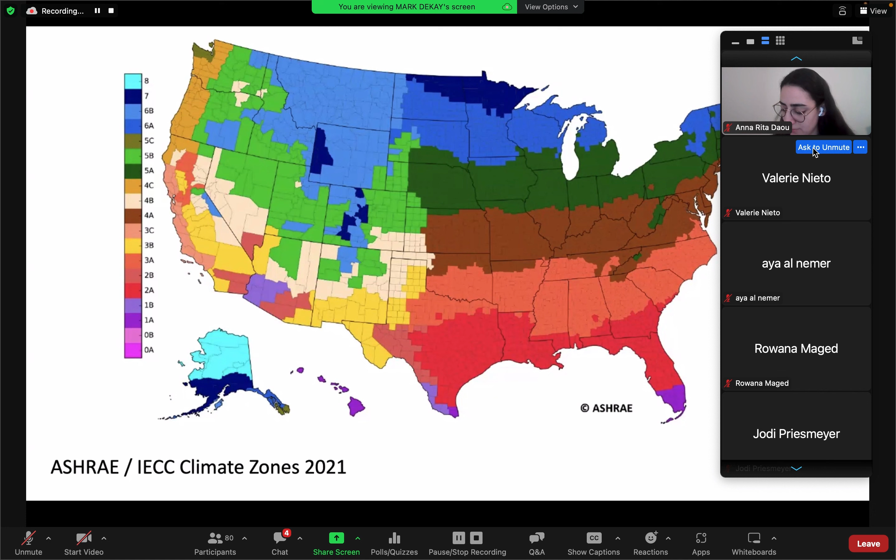I think this logic of the evolution of climatic zone thinking for buildings is important, because ASHRAE and the Department of Energy really started off with a very North American, or even continental US-centric idea, and they didn't cover the hot and cold places very well. Another thing happening is that because of climate change, many US counties have been reclassified to warmer zones.

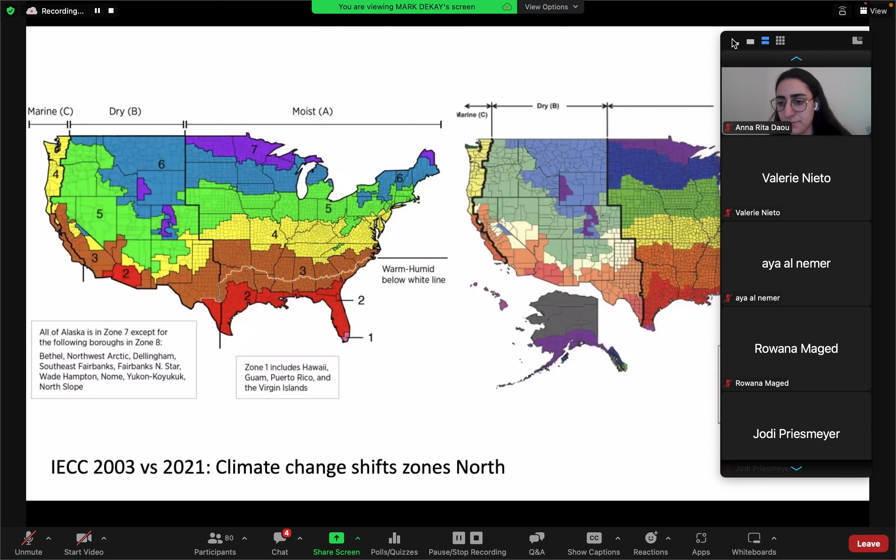Almost all the zones that changed between when we started this system—2003 on the left, and 2021 on the right—almost all of the places that changed got hotter. You notice down at the tip of Texas, there's now zone 1 that used to only be Hawaii and South Florida. In South Florida, that zone has crept further north and gotten bigger.

If you look at the line between zone 3 and zone 4 in Tennessee, over on the west side near Memphis, in 2003 that was the only zone 3 part. Now that line has moved up so that almost half the state is zone 3, not zone 4. That's happened all the way up—they just keep pushing further, and that's in less than 20 years. So if you want to see what's happening, there it is.

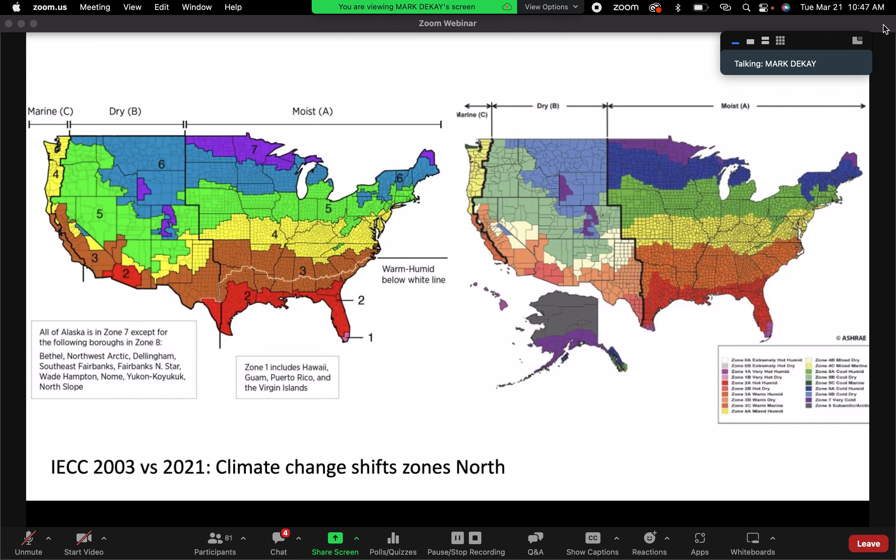Climate change is real. Notice that these IECC types classify climates as A, B, and C—A moist on the east side, B dry on the west, and C marine out on the west coast. Remember A and B particularly, because we're going to look at why that doesn't work so well.

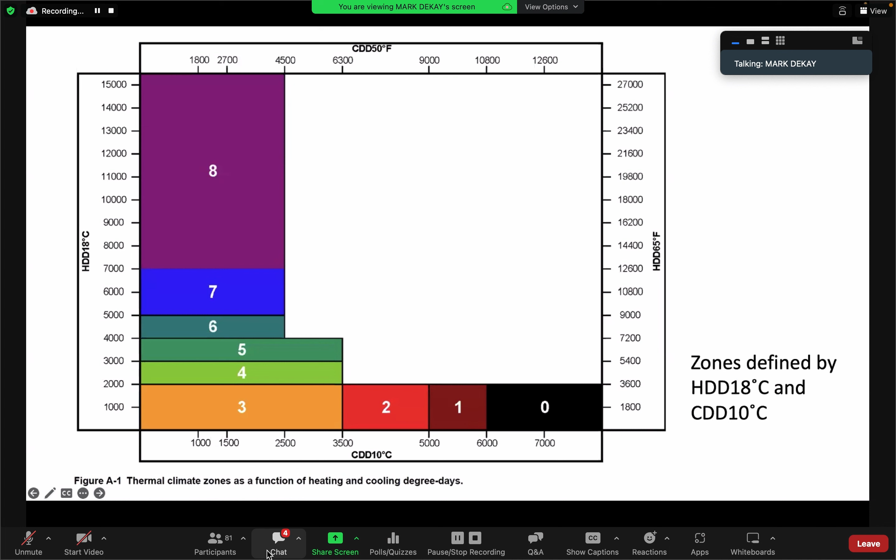Here's a graphic from ASHRAE useful to decode these zone definitions. This new zone 8 goes from 7,000 heating degree days up to the coldest place on the planet. The new zone 0 goes from 6,000 cooling degree days up to the hottest place on the planet, whatever that would be. So they just made some new zones, but they became very large.

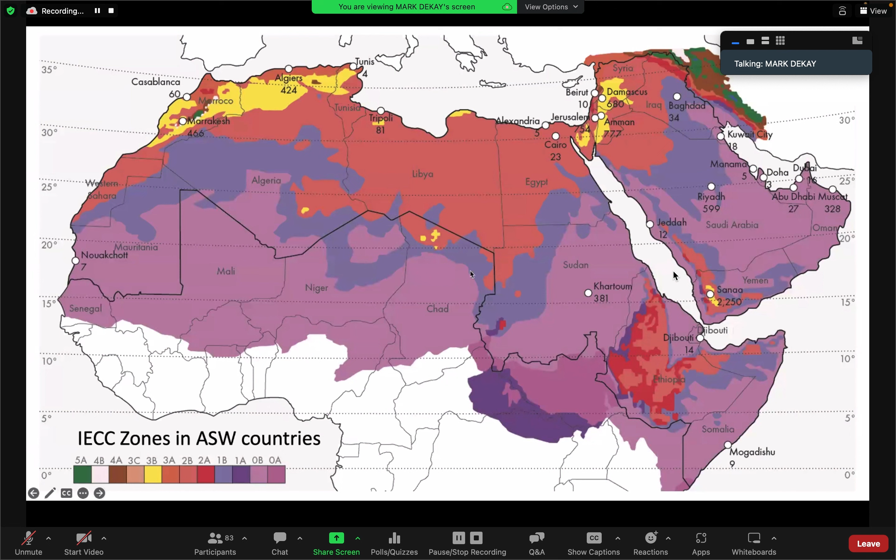Immediately, however, it seemed that something was off. Abram, I have to give him credit, he knows the region, and he noted that Jeddah and Riyadh were both classified as zone 0B, very hot and very dry. But Jeddah is by the sea, very humid, whereas Riyadh is inland and very arid. How could these two extremes of humidity, like Miami and Phoenix, be in the same zone? This clearly wasn't looking good for our idea of recommending strategies by climate zone.

So we had a problem. We put it out on the email list, we called up people we knew, we said what should we do? And some experts said we should use Koppen Geiger.

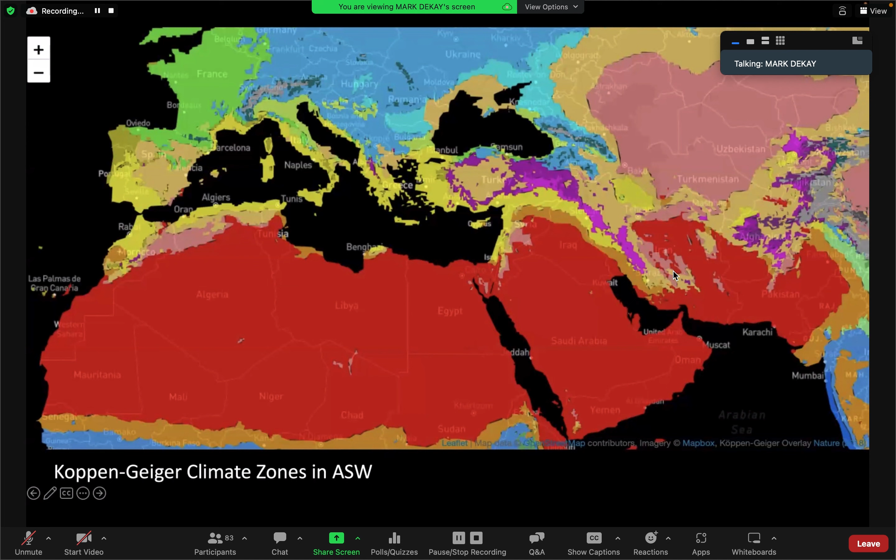When we zoom in, we can see Saudi Arabia here. It looks like this: it's all one zone, it's all hot, it's all desert. It's all zone BWH in the Koppen system, hot desert. So again, Koppen has Jeddah and Riyadh in the same zone.

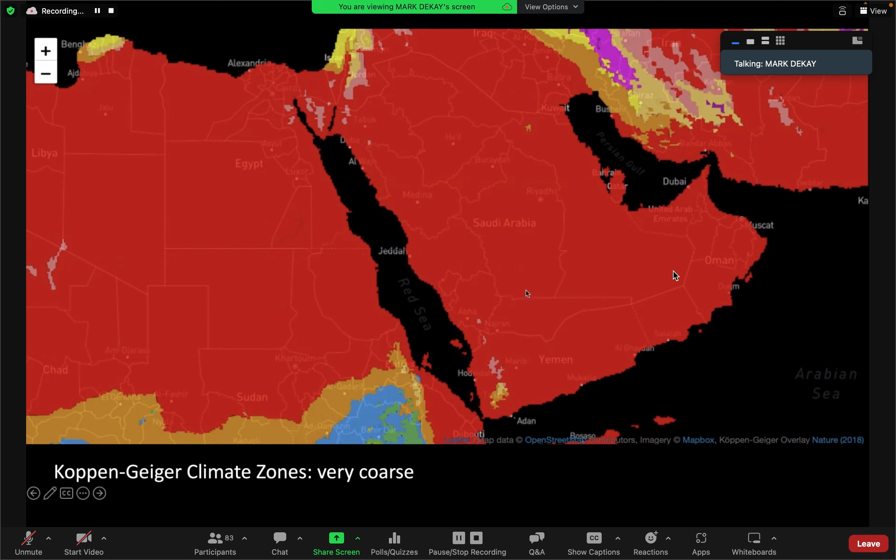And you might say, well, so what? Except that if you're using a system of climate zones to recommend design strategies, you can't have those two cities in the same place. So Climate Scout is recommending the same design strategies for very humid Jeddah and very arid Riyadh. Here you see evaporative cooling, green roofs, water features like a fountain. That's great if you have dryness, but not great if you have humidity. It doesn't work at all. In fact, it makes things worse.

So clearly Koppen, and therefore Climate Scout, was not making these important distinctions about humidity, which are driving things like evaporative cooling, dehumidification, latent loads in cooling systems, and so forth. So again zeroing in, looking at our real method here, we took a look at relative humidity.

We looked at it in several ways, annually and for the hottest 6 months, and we've got 20-some odd cities we're looking at. This is just a sample. And it turned out it didn't work at all, it failed. For instance, zone 0 ranges from 14 to 58% humidity. You get 58% in a zone 0, hotter than Miami, hotter than South Texas. That's a lot of moisture in the air when the air is that hot.

Zone 2B, supposedly dry, had more humidity than 2A, moist Beirut. And 3A Casablanca, 3A Algiers have the same values, so a dry and a moist zone had the same relative humidity. So this wasn't going to work. We didn't really think it would work, but people said try it out, so we did.

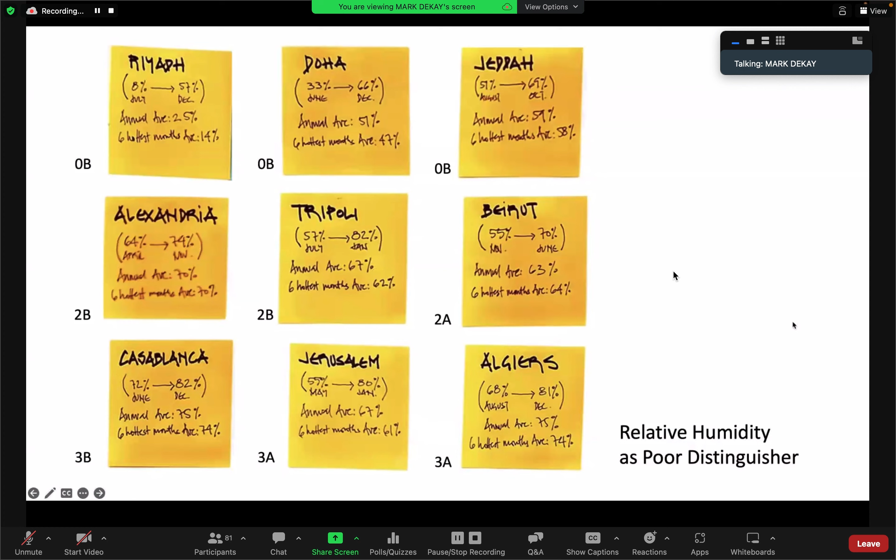Then we said, all right, we remembered there's this white line. ASHRAE used to publish these maps with a white line that was the warm, humid line, and it was actually on the original climate zone map from 2003. So we asked again, guys, do you know where this comes from? We asked all our buddies in the building science world—maybe they're not old enough to be in our category—and many of them, so nobody knew where this came from.

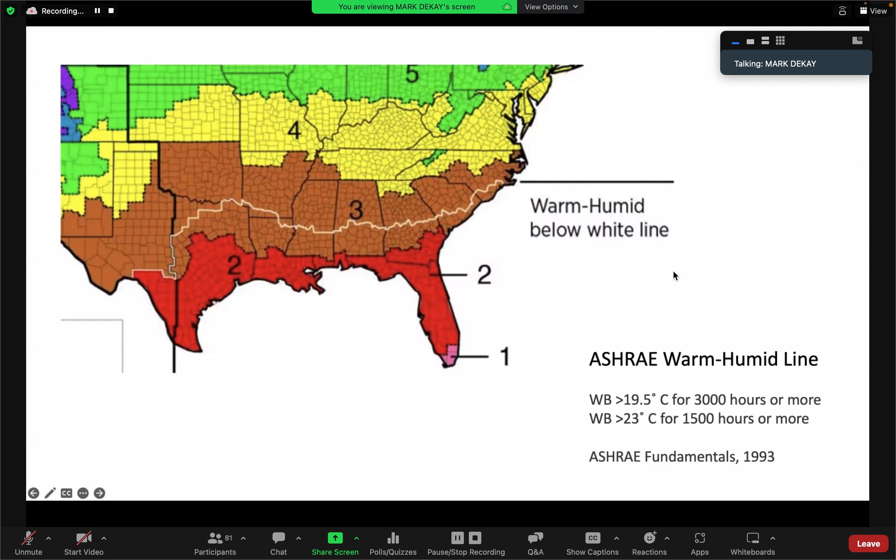So we went back into the literature, and finally, back to 1993, we found it in the ASHRAE Handbook of Fundamentals, which defines the warm humid zone using wet bulb temperature. It's like dry bulb, except, well, you know what wet bulb is—it's a much better marker for humidity. So they said if it's 19.5 C for 3,000 hours or more during the hottest 6 months, we'll call that warm and humid, or if it's 23 C for 1,500 hours, we'll call that warm humid.

So we said, all right, let's try that for all of our climate zones. We got into the hourly data and ran the numbers on it.

We counted up these wet bulb hours in each location above these two thresholds in the hottest 6 months, so we could compare it to that ASHRAE line. And we got some strange and unexpected results. In the red box here, all but two of the 0B hot and dry desert cities were actually classified as humid. And by this definition, probably what shouldn't have turned out this way in our mind, none of the A, the moist climate cities, qualified as warm humid. So Beirut, for instance, was almost warm humid, but not really meeting the metric. This metric began to explain the difference between the arid and the humid in the hot zones, even where there was not much rainfall.

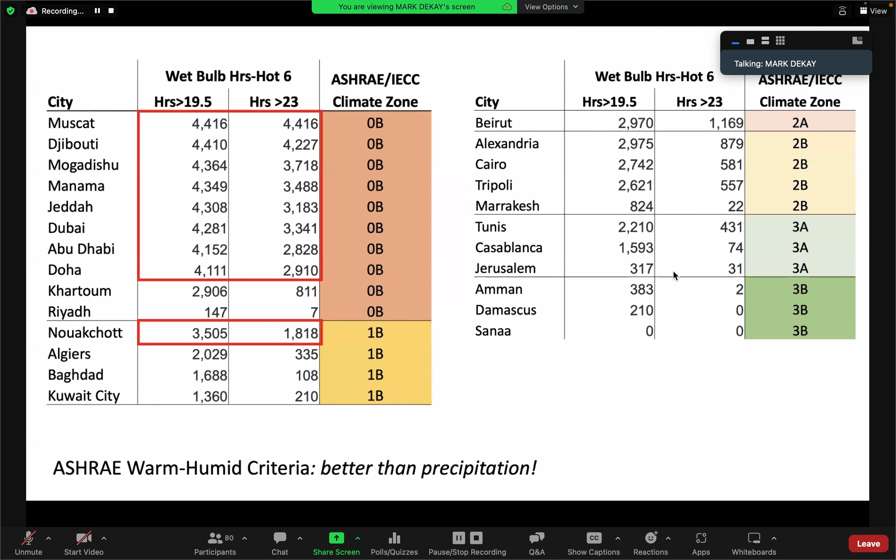But we also started to think, well, what about Muscat, Oman, right? This place that's super humid. Is an hour there equal to one in Casablanca? What if the wet bulb was actually way above this 19.5 threshold? So hold that question, because we came back to it.

Meanwhile, there's a lot of streams going on. We're posting on really big walls, pin-up walls, two complete walls in one room. We're posting examples of traditional and modern architecture from each of these cities or near them. And we're looking for what strategies are in those buildings, and could that tell us something? And then we're trying to sort these cities into climate types by looking at various metrics. And it's working, little by little, better and better.

And on the other hand, some people said, well, just forget about climate zones. You don't need climate zones anymore. We have computers. Just count up the hours in the different strategies that fall into these different zones on the psychrometric chart. So if you're familiar with Climate Consultant, it uses these overlay strategies based primarily on the work by Murray Milne and by Givoni, originating with Givoni's work.

In this case, we first looked at natural ventilation, and it was useless because many of the places are just too hot to open the window most of the time, particularly if you're looking at the hot months. We started off thinking like North Americans maybe, let's take the hot 3 months, and then the hot 6 months. But the comfort zone in this case is fixed.

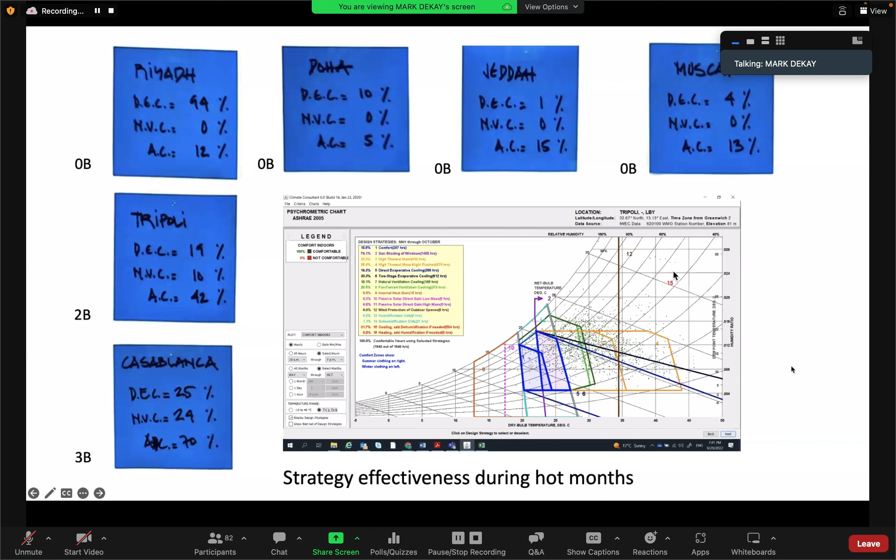So meanwhile, we decided, all right, let's improve on this wet bulb method and use wet bulb degree days, which we'd never seen anybody calculate, but it seemed like a good idea. Wet bulb degree days are sort of just like heating and cooling degree days based on dry bulb temperature, except we're using wet bulb as a base. So what that does is it says, let's look at the wet bulb temperature, the average for that particular day, and if it's higher than whatever your base temperature is, then subtract the difference.

And that's how many degree days, wet bulb degree days, you get for that day. Do that calculation day after day after day, and then add them up and you get a picture of the climate. That's how we get heating climates and cooling climates. In this case, we're looking at humidity. And this provided a much better range that aligned better with this evaporative cooling potential we were looking at. It allowed us to distinguish between cities that were closer to the sea and ones that were more inland in the same climate zone.

We tested 4 different base temperatures because we had no idea which one would work best. It turned out that if you wanted to get some numbers in every climate, we had to go with 19.5, which aligned right with the ASHRAE white line we were looking at before. So this seemed like a pretty good idea.

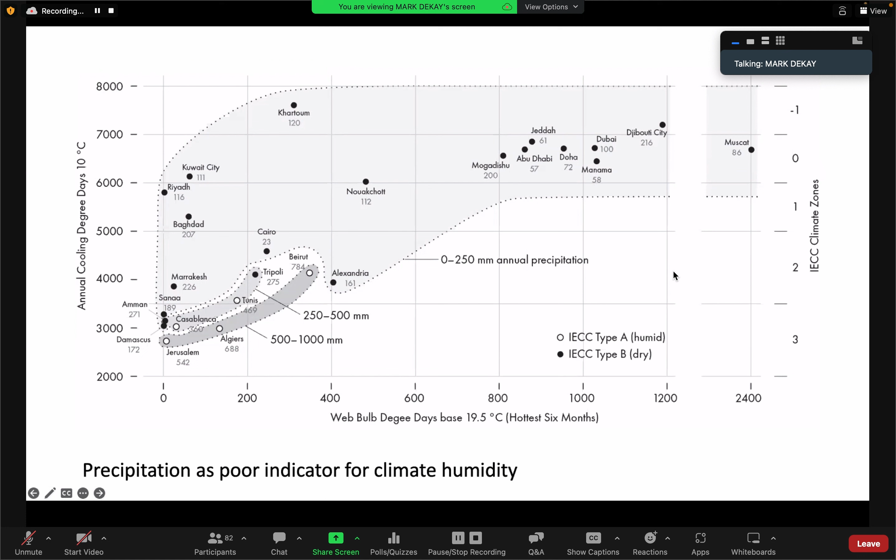So then we did the same thing with the Köppen system. We overlaid the Köppen designations, and that's these 3 bubbles now. You can also see that it doesn't work at all. It fails for making any of those important distinctions.

It has Casablanca and Beirut in the same zone. It has Kuwait City and Dubai in the same zone. And those are just radically different places.

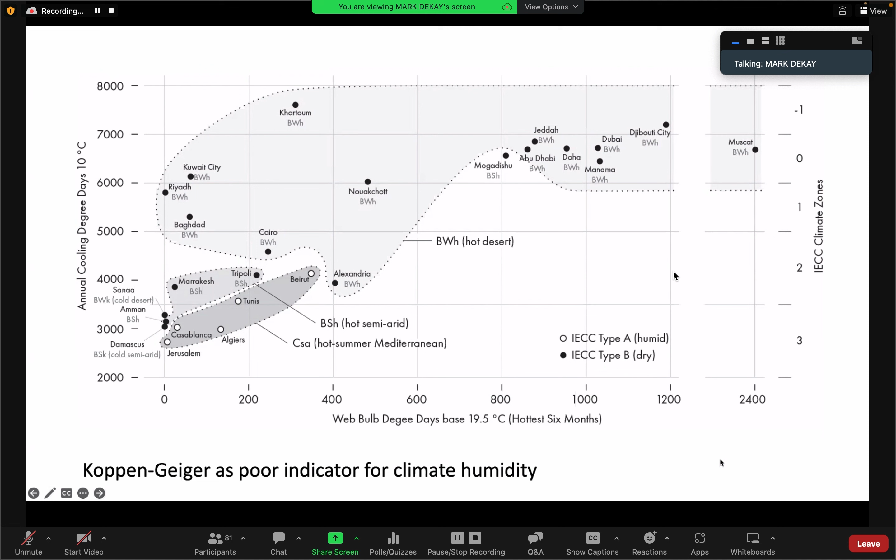So we're proposing to keep this idea of the numeric zone system, although the zone 0 that's recently been added seems kind of large, almost like we need a zone -1. On the other hand, the A, B, and C types in the typical conventional system don't seem to work very well.

We think there should be some kind of more nuanced way of understanding places based on their humidity, not based on their rainfall. These divisions make more sense in a nonlinear way, so you'll see that A, B, C, and D are not even increments of distinction. There's no right answer for that.

We made it up. But that allows us to get some distinction between truly arid places like Riyadh and Baghdad, semi-arid cities like Cairo, known humid places like Beirut, and then a whole other category of hot and very humid in the Gulf. And then there's this weird outlier of Muscat, Oman, that's just twice as humid as any other place we studied.

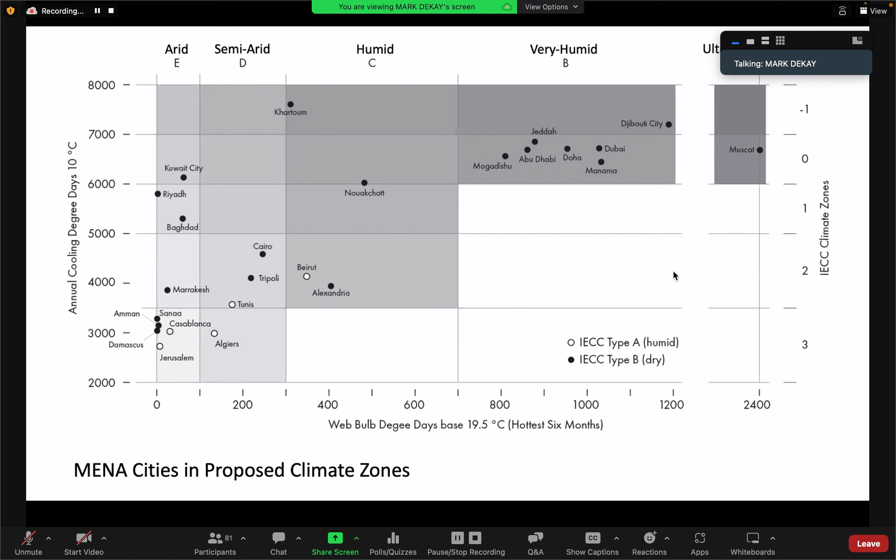So here's the simplified version. Truly tropical cities like Singapore might change this, but we haven't studied those places. Most of the region we're looking at isn't in the tropics. Some of it is, but not much.

So these wet bulb degree days seem to be a good indicator of dehumidification needs and evaporative cooling potential. We've also based it on ASHRAE's hottest 6 months. Now that may be a problem because some of these places actually need cooling all year round.

If we get out of our headspace of thinking about North America, there are places in this region where you can open the window in January and it's just fine.

The other thing is that it may be we should look at something like where this base temperature occurs for heating and cooling degree days. They're using base 10, 50 degrees. That seems to me to be suited to a big air-conditioned building, a conventional climate zone, one with a lot of internal gains. That may make sense in some places.

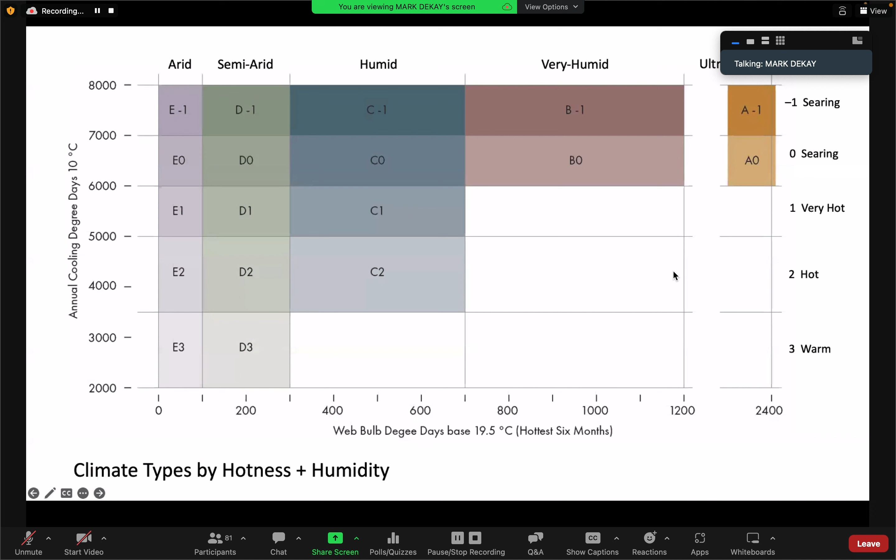It may not make sense here, because almost no one is going to start cooling when it's 50 degrees Fahrenheit or 10 degrees C outside in a residence.

So why that's important for us is that in the typical way of looking at strategies on a bioclimatic chart or on a psychrometric chart, either one, you get a fixed comfort zone.

We ran across Andrew Marsh's online psychrometric chart, which, if you choose the right choices, allows you to look at how that comfort zone moves over time as the climate gets warmer during the year.

We also recognized that the statistical percentages we were getting out of Climate Consultant didn't tell us what was happening month to month, and whether that strategy was going to work.

So what we did is assess a series of different passive cooling strategies for each city in each month. We plotted the average day for that month and the design day for that month, which is like the 2% hottest day. So we got the hottest day and the average day.

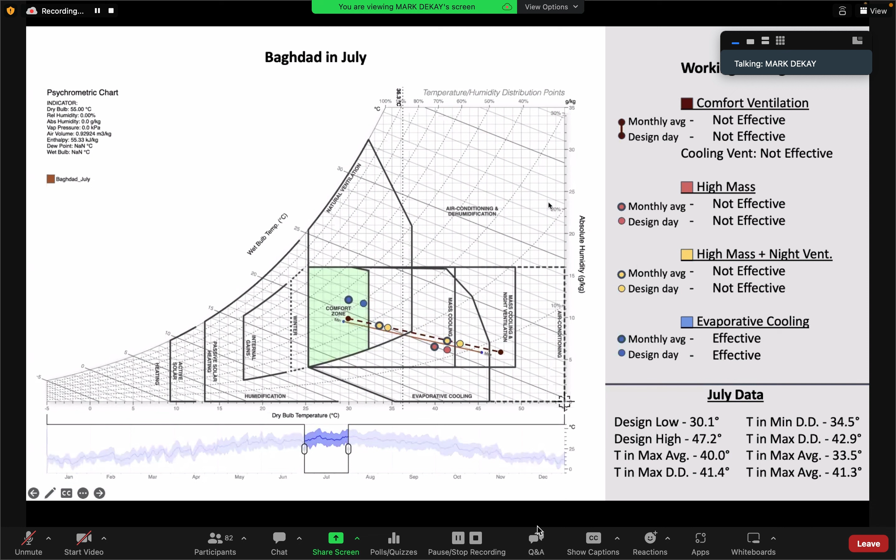And then as the climate gets cooler again, you go back towards winter. Now the zone is moving back to the left, and actually what's happening there is the passive solar stuff is even working better. The heating strategies are working better because you're dropping that climate zone back down.

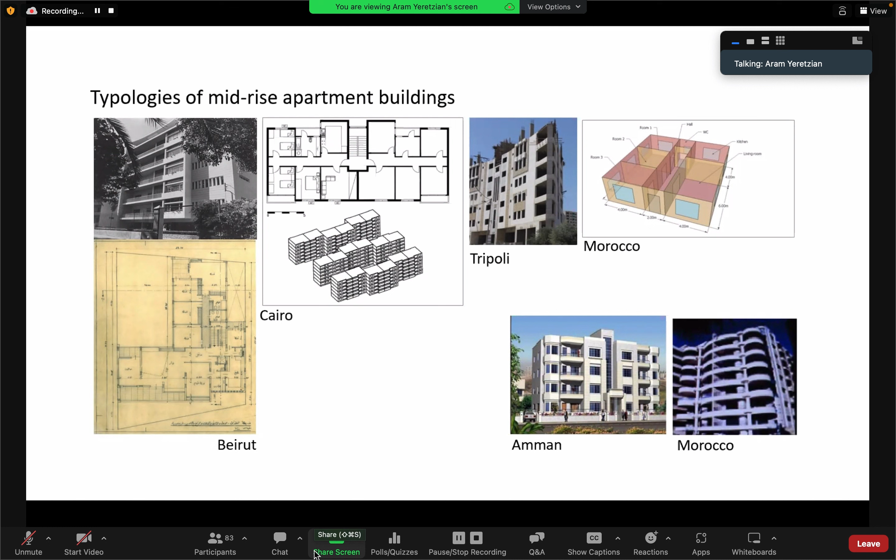This is a selection of buildings that illustrate the commonalities found in these contexts. Today we find, as mentioned earlier, very different climate zones in the Arab-speaking world. However, the typologies of the buildings are very similar - you will see similar use of materials, similar heights, similar window-to-wall ratios, etc. The characteristics of these contemporary buildings I've summarized in these 5 bullets.

If we take a deeper look, this will allow the identification of the following characteristics for a mid-rise residential building typology. This will, as you will see in a bit, inform the opportunities that may result from this methodology and approach.

There's always a vertical circulation component and a service core in these buildings. We're talking about mid-rise, and it's important to mention these are buildings from 6 to 15 floors. So there's always vertical circulation - stairs, lifts, at least one - as well as other vertical components all included in this core. It's found in pretty much all buildings.

If this component is designed to serve for natural ventilation, it can accommodate different strategies - this is where it becomes really interesting. Depending on the site's wind condition, vertical wind flow can go upwards or downwards, basically in the form of stack ventilation or as a wind catcher, which can help the natural ventilation mode in such buildings.

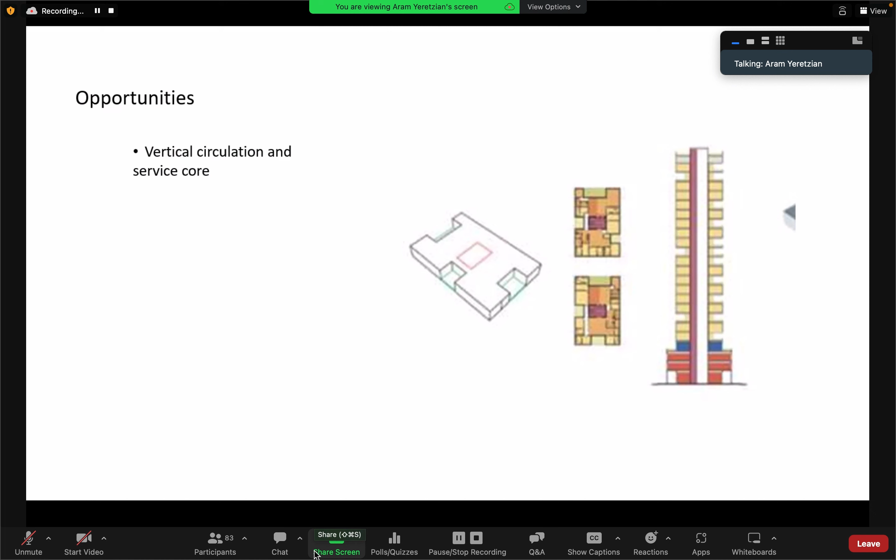The fact that there are always 6 to 15 floors is the general level of floors existing in these buildings. This is important because it allows for, or requires, different ventilation strategies at different floor levels. This is affected by the exposure, the orientation, and the air quality.

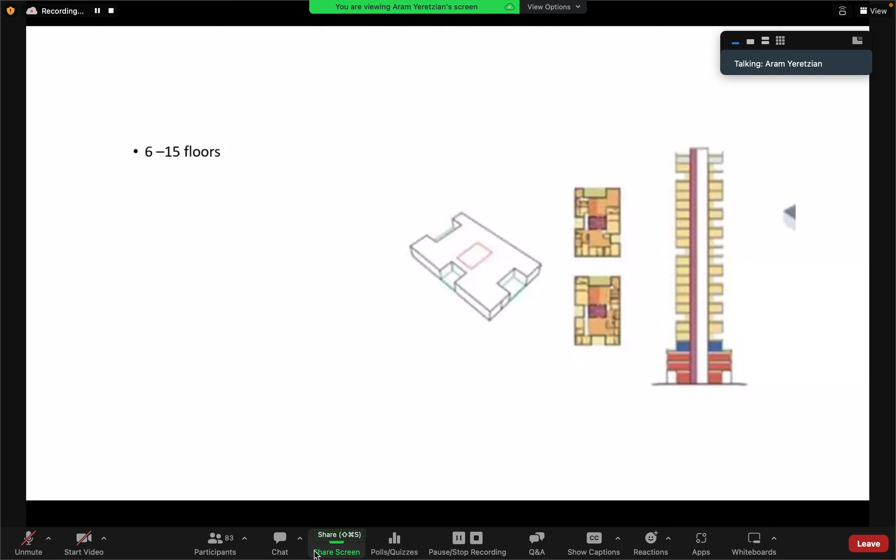This makes it possible to integrate a variety of wind strategies, because at the lower levels, buildings are usually more obstructed to wind flow, which differs at the mid-level of a building, and buildings become much more exposed to the prevailing wind direction at the higher level. There's another interesting particularity, which is that the higher the building, the more basements there are, and that provides an interesting opportunity because of the contact with the ground - everything below ground has more surface area in terms of contact with the adjacent soil.

So we can see patterns in terms of structure whereby the central core is the most massive component, and as you go outwards in the building, it becomes less. There are also other particularities, which is the fact that at the lower level, the sections of these components are thicker and bigger, bigger cross sections, because they're supporting more weight.

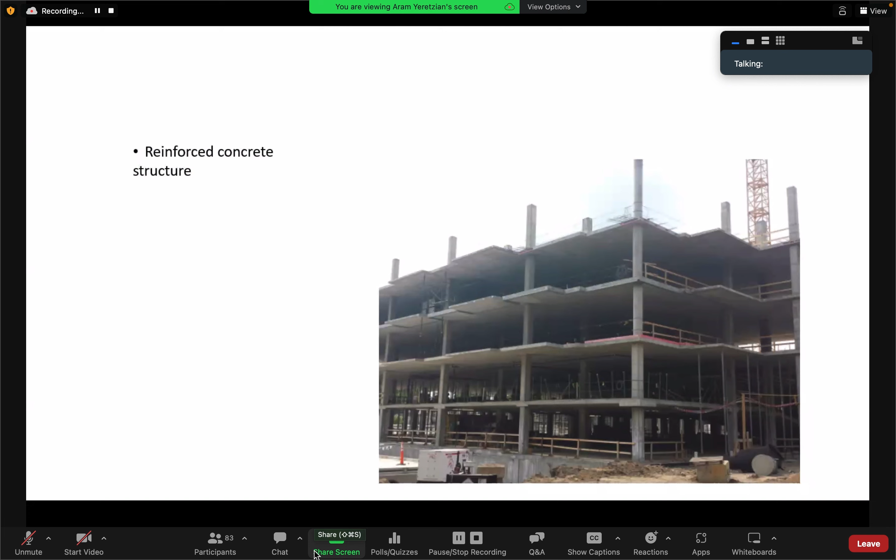Although this is a hot part of the world, in many contexts and at different times of year and different times of day, outdoor spaces, balconies, terraces, loggias are of utmost importance. These contribute, other than the environmental aspect, other than them being a climatic buffer zone between the exterior and interior space, they also contribute to the social mixity and social richness of this area.

And so they vary a lot. These are very common, but they vary in terms of configuration. So these may be recessed within the building, these may be protruding, these may be in the form of cantilevers, so on and so forth. And again, we will see how this could be an interesting opportunity.

They also, by the way, we're talking mostly about wind, but these can also help in terms of becoming shading devices to particular elements on the facade.

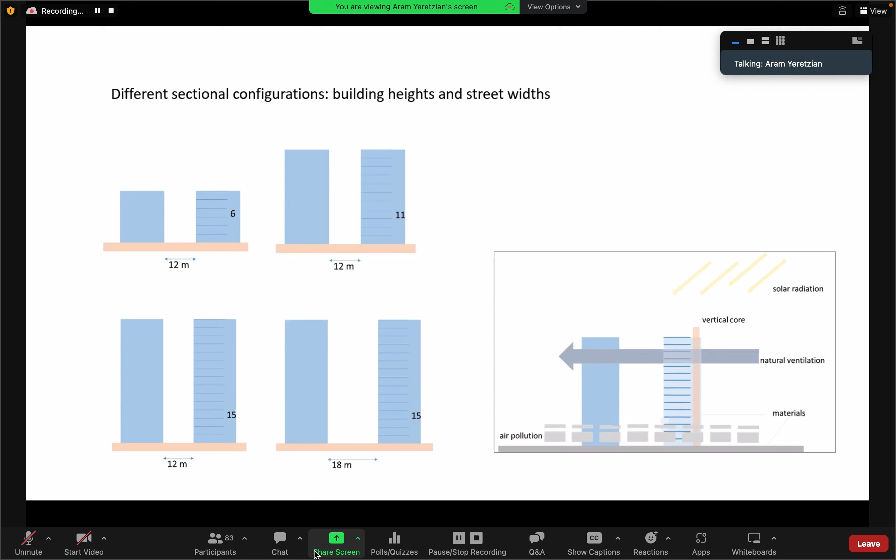So it's building use, what is this building used for, and the spatial requirements, the program. Also, it relates to the applicable strategies to the prevailing wind direction. So we can look at the city glyph at this point and identify what are the useful or efficient strategies that are applicable to this site.

Second, we would analyze and assess the availability of wind on site, both in plan and in section. So, is the wind reaching the site?

And if it is, what is happening at different levels? Again, this is very important because of the difference in heights and what's happening in the context.

In step number 3 here, we are again looking at the city glyph. This glyph provides two levels of information: first, what are the important or efficient strategies and what's happening during the year, and second, to what extent within each month the strategy is useful within this particular context.

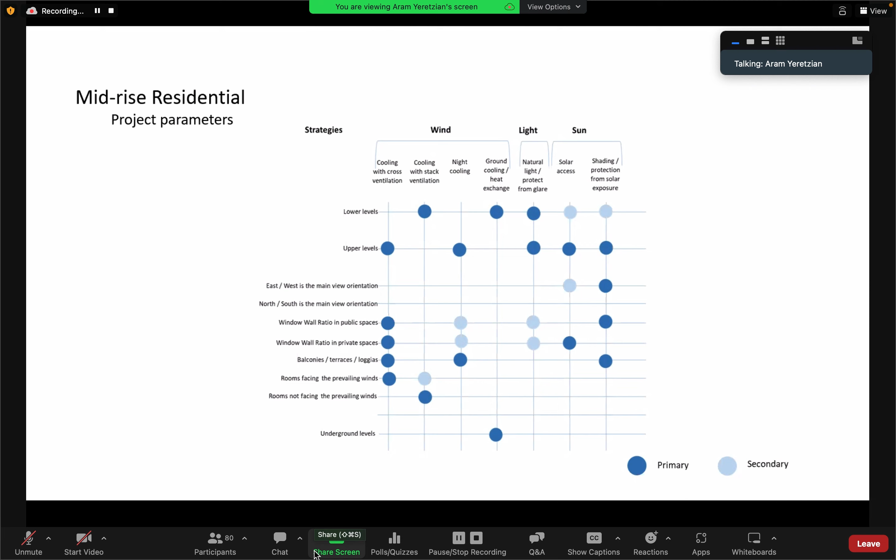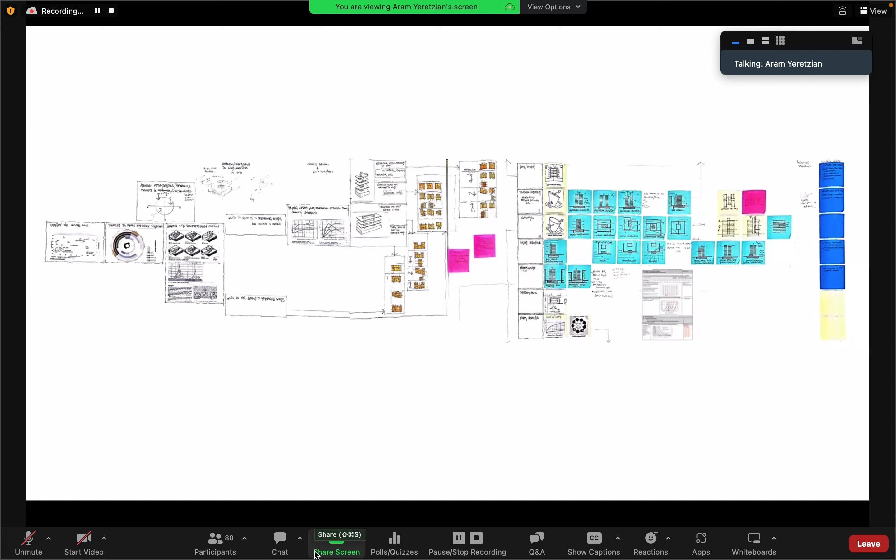It would start by defining the climate zone, as we saw earlier. Then the design team would look at the city's wind patterns, the available wind patterns on that site, and the prevailing winds, how they differ during day and night, and during seasons, etc.

After addressing wind at the large scale, you want to conduct a more confined study of wind availability on the site itself, the site where the design team is studying a project.

Considerations of the roughness of the city, the density, and the roughness in terms of building configuration and building morphology are very important. Topography is also included, as well as the microclimate conditions of the site. All of these parameters are addressed together to identify what is happening at the site.

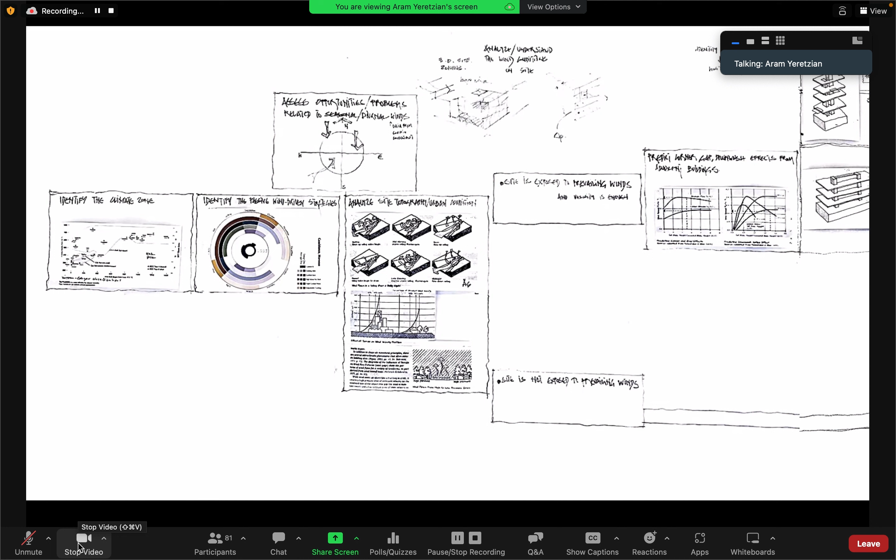A good way to understand climate is to have a weather station on the site. In some cases, if that's not possible, information has to be extrapolated from somewhere else, or it could be simulated.

Once we look at the particularities of the site, we in parallel look at the actual building typology, wanting to identify or distinguish two different main aspects: does the site receive the prevailing winds, or does it not? This is an important aspect to define at the early stages.

If the prevailing winds access the site, this gives rise to a set of strategies. If it doesn't, we need to use other strategies.

In parallel with that, as you can see in this diagram on the top right, we're looking at the building morphology: does it have one core, does it have multiple cores, how many floors, etc. This all becomes very relevant because I'm thinking about the wind as well as the building itself.

In the colored diagrams here, in the middle of the slide, these propose some transformations to the massing layouts. There's a particular massing, as we saw a few slides before, and these massing layouts can morph or transform so that they enhance the wind flow inside the actual building, inside the spaces of the building.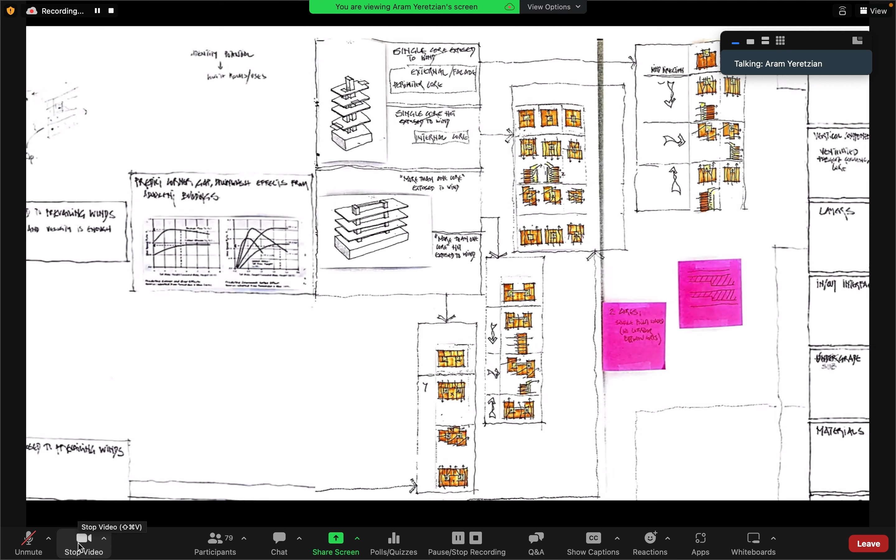After a thorough assessment of wind availability and building configuration, the architect and the design team can study numerous strategies, as shown in these post-it notes here.

These are just sketches documenting some options that could be applied. These numerous strategies are compatible with the contextual givens, and they include cross ventilation, the wind catcher, stack ventilation, evaporative cooling, and mass cooling.

So there are ample possibilities. The idea of this slide is to show that this is by no means confining the thinking mode and the approach. On the contrary, this is to actually open up the potential for exploration and for design options.

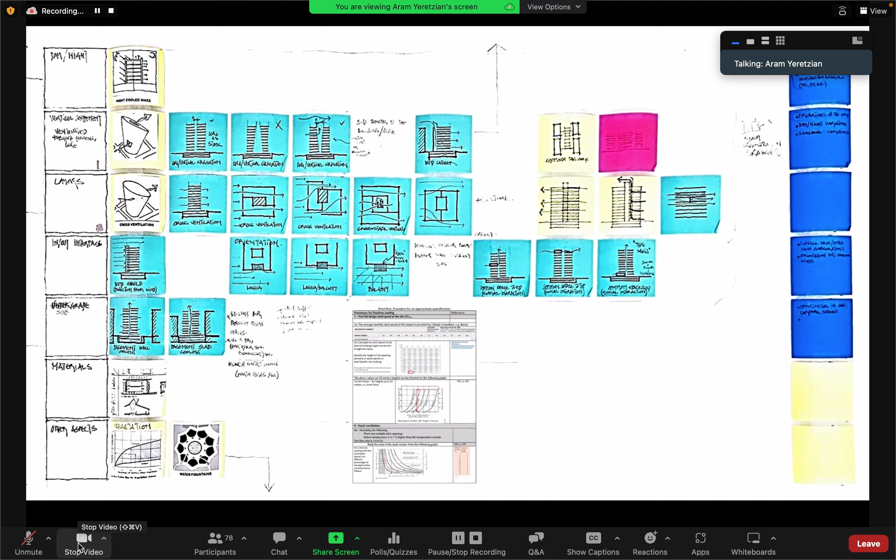I'm showing here, in terms of assessing the strategies at the early design phase, an example of that assessment. This is a particular strategy, which is stack ventilation.

We would start by getting the wind pattern from the airport, as you can see at the top row there, because in most cases the airport wind information is available. Then using a software from the Danish wind industry, shown in the upper diagram with the red rectangle - this is the Danish Wind Industry Association.

We can actually get a better understanding of what is happening to the wind at different heights in a particular site, based on the roughness of the context. So this comes down to, on one extreme, we have a very urban context, and on another extreme we have, let's say, rural or even open fields - that's the other extreme of roughness.

Looking at that, it's a free interactive software that is online, and we can get an understanding of what's happening at the different heights. We can, of course, double check - it's always good to double check.

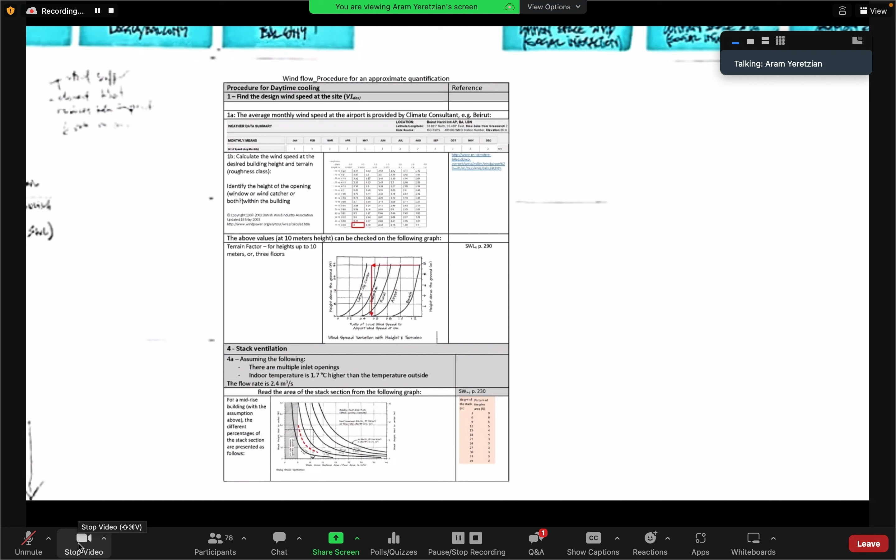The graph in the middle is from Mark's book, Sun, Wind, and Light. It can be used to identify what is happening in terms of wind, and to counter check the chart above. After that, once we understand what's happening on the site, we can use the graph below

to identify what section is required for stack ventilation, right? So this gives the sectional area of the stack that is required to make stack ventilation efficient.

It's very interesting to note - it's probably difficult to read, but in that small orange rectangle, I actually did multiple runs to see what is happening at different heights, at 3 meters, 6 meters, 9 meters - these are at every floor. And you will see that the stack actually differs in terms of sectional dimension or sectional area.

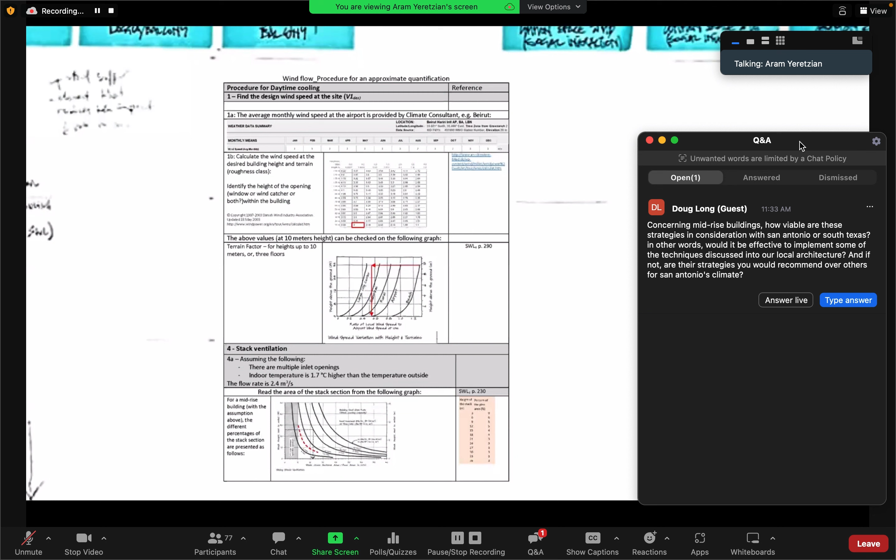That could be really, from an architectural perspective, very interesting input that can inform the design of a building, and in particular the design of the core. So I hope this was clear - I tried to summarize the whole approach.

In conclusion, I'd like to end here by saying that this is where we are in the journey. The takeaway message here is that it lies in identifying the opportunities, right? We're trying to flesh out what are the opportunities to design these mid-rise residential buildings that are very common in the Arab-speaking world, and that, as we were discussing before the presentation, will become hotter contexts as we move into the coming decades. So it's really important to look at these.

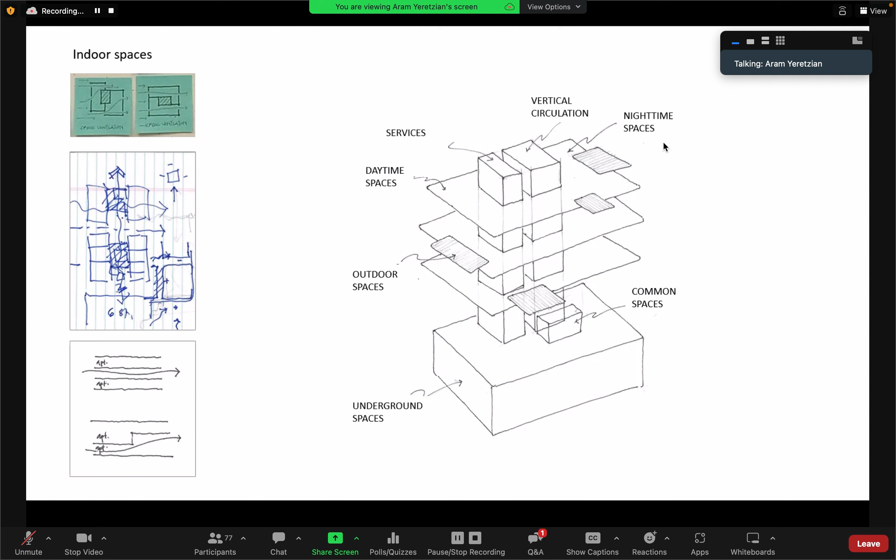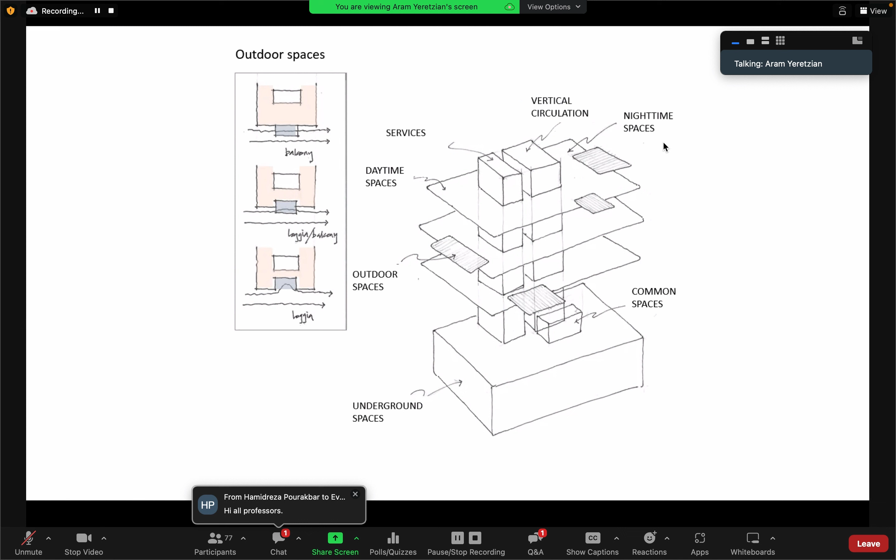We presented insight regarding our approach and methodology, and some preliminary results. The apartment plan configuration, either on one level or two levels or maybe more, is so important to enhance indoor ventilation. The second component is the outdoor space, or maybe I should say the buffer between inside and outside.

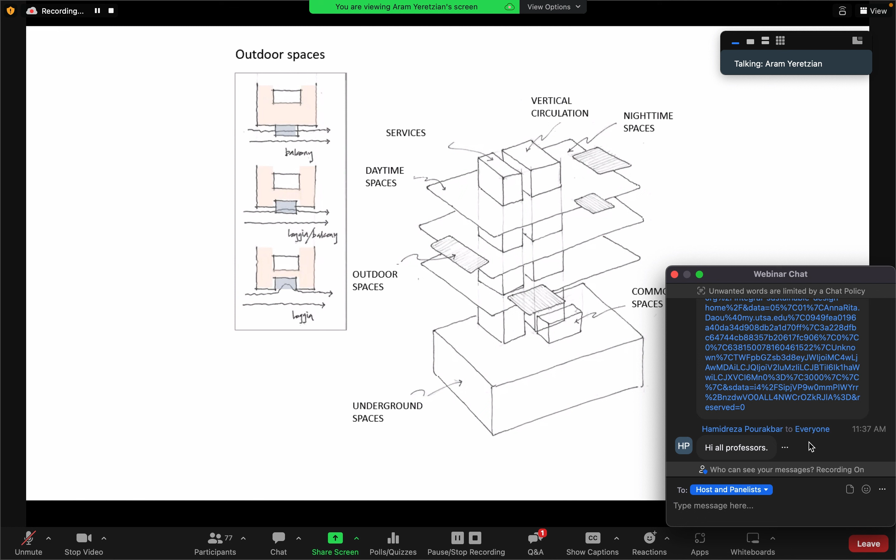Again, how that is configured in a project - this buffer space does not have to be the same on all elevations, because if you relate it to wind flow and capturing wind, it could be very useful as a strategy. So it could vary depending on the orientation with respect to wind.

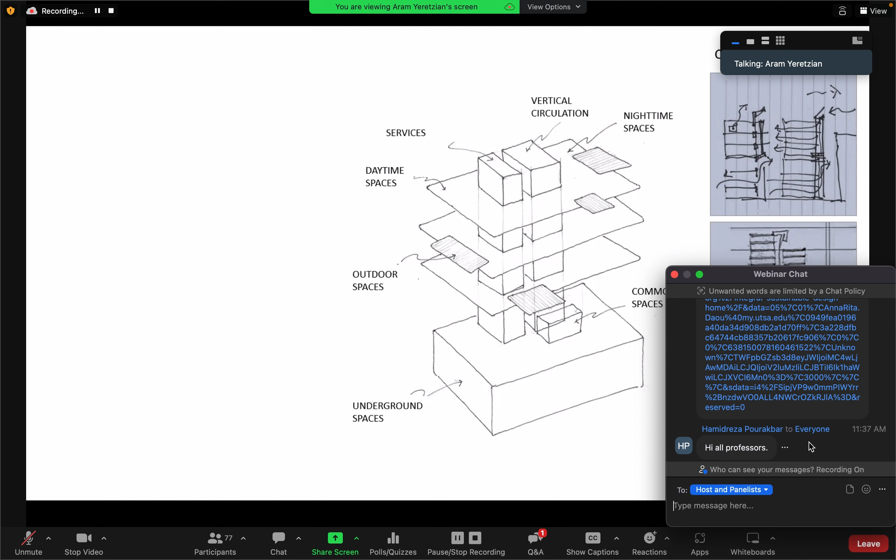And the third is in fact the core, right? This vertical component which exists in all buildings. There are so many possibilities and options, either having one core that works all together, or subdividing this core into different zones. After 5 or 6 levels, the efficiency of the core will reduce significantly, so this is where we can subdivide the building into sections and have cores that work in parallel.

This is, in fact, the summary of these preliminary results.